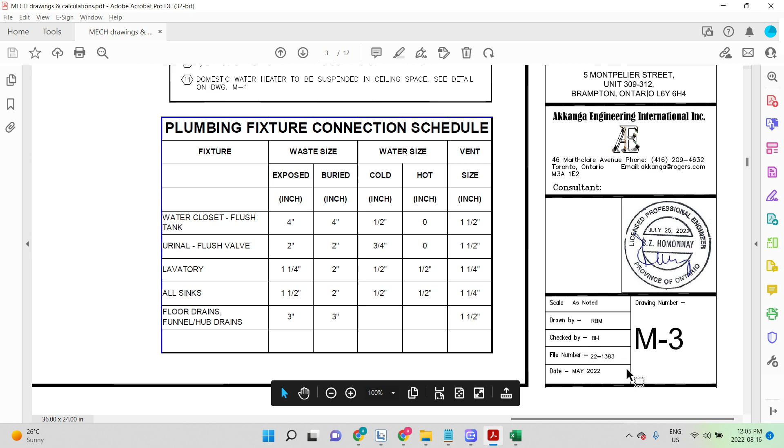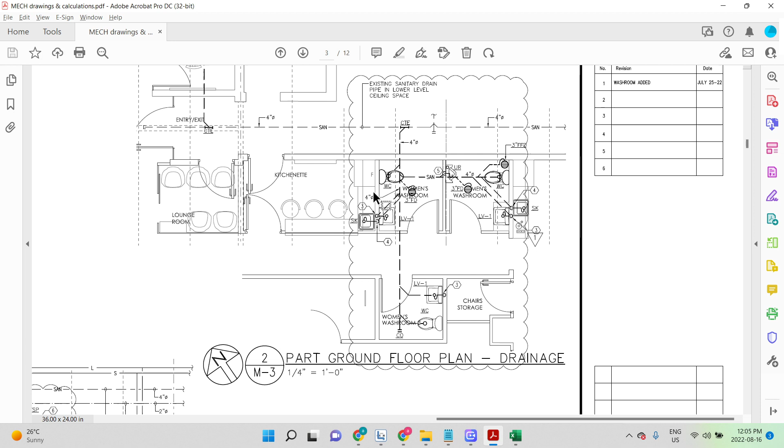But anyways, I'll let you know what this is. I have to check the architectural drawing. I just started, so I said I'll just make the video and go ahead with this. So this is the job right here. This is a drainage, it should be slab on grade, so we're gonna do it that way. Now I'm just gonna do a takeoff, and it might help you. Just one more takeoff video that we're gonna do.

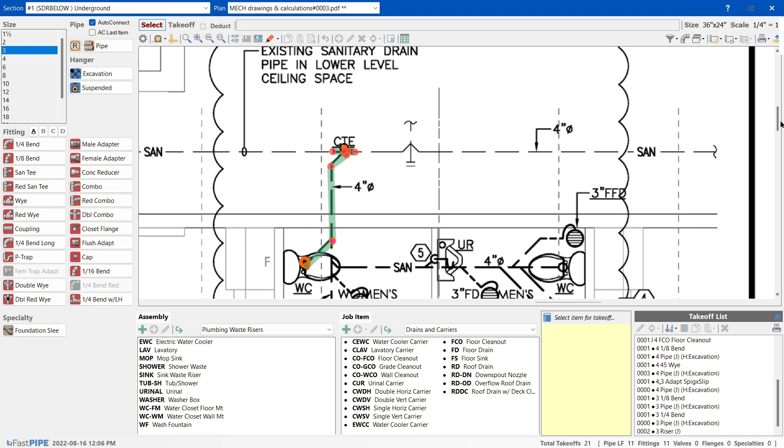So I set it up. I'm starting with underground drain. I did a little bit, but then I stopped, so I'll just let you know. So far we are here: 4-inch pipe, 4 by 3 inch reducer adapter, then made it into 3 inch. Continuing over here, I'm gonna put some music on.

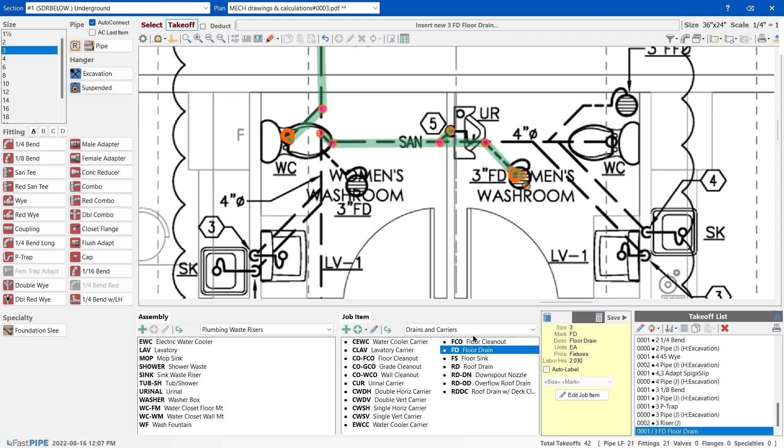45. 4 by 2 inch, so another Y, 4 by 2 inch, 2 inch 45. I like to put a 45 and a 90. The reason is in case you want to put a 45, you can always bring it to the position, so that's why we do that. Then it's 4 by 3, 3 inch, 3 inch again, 45, 3 inch trap, 2 feet of riser, and a floor drain, 3 inch. Beautiful, that completes this. We keep following here.

So I'm not gonna take two, I'm just gonna take one. Underground, I'm just gonna take this one, 4 by 2 inch.

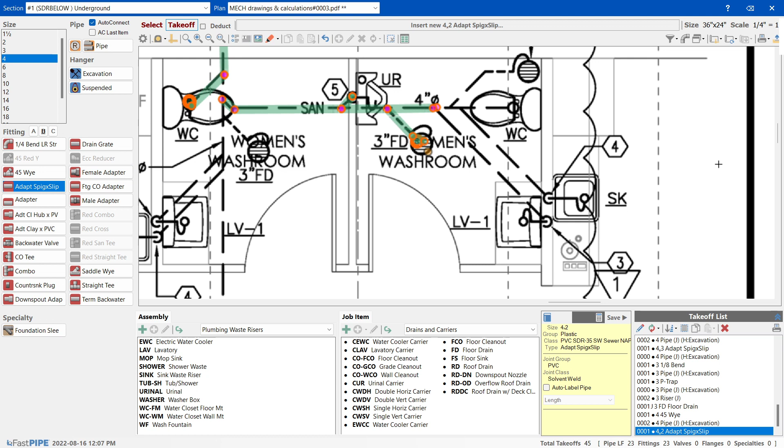So this floor drain, I can wet vent this. So I can wet vent this toilet, and this thing. I can do it all in three. I can wet vent this with this. So let's do it that way, okay? So let me just change all this.

Wet venting is something that a plumber can do to avoid more vents. So we're gonna remove this, right? I'm gonna show you how we do the wet vent. So this is a 4 inch, this is a 3 inch. So this is a 3 inch floor drain and its fittings. Now I'm gonna wet vent this floor drain.

So when you have to wet vent, you cannot take the vent from here. You see how I have to take it from this. This is called the branch fixture drain. This is called the branch drain. Why is it called the branch drain? Because now a lot of fixtures are connected. For example, this is called the branch drain, this is the branch drain. So let me mark the branch drain in one color. Okay, so let me just make it very simple.

Hold on. Let me just explain you something, so at least that way, when you guys are doing it, at least it makes sense, right? It's a branch drain, this is a branch drain. Sorry, this is a fixture drain. These are all fixture drains. And...

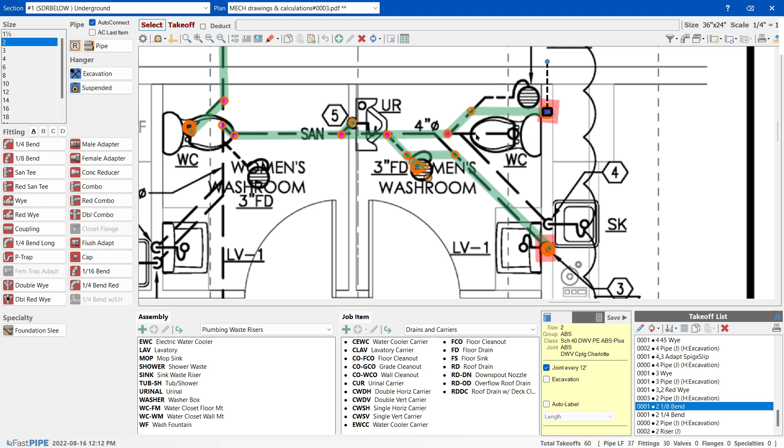So this pipe is for the sink here. I'm going to show you how we're going to do that. Now, why did I bring it like that? The reason is because to wet vent a three-piece, one, two, and three. We're gonna talk more about this when I make another video about wet venting. But for the sake of estimation, estimators can follow this drawing. They don't have to really do it the way I'm doing it, because it requires a little bit of plumbing knowledge. But what it does is that for material takeoff, everything is exact. You don't have to redo it again, so it just saves you a lot of time. That's all.

Another thing we need to do is now 3 inches here, 3 by 2 inches here. So let me just continue this. And 3 inch trap, 3 inch riser, floor drain, and you can just copy paste this too, but whatever. Pretty much then that's it. Take this straight up, riser. Sorry, not clean out, toilet flange.

So that's done. I wet vented the toilet, the floor drain, and the sink together. And instead of giving them individual vents, I can use one vent for everything. Now a sink is always, this is in the floor, but a sink is never in the floor. A sink is always in the wall for 99% of the time, unless it's an island sink or some issue where you can't bring it into the wall. So long story short, you need to have a vent here. Always behind the sink, you're gonna have a vent. So that's why we do it this way.

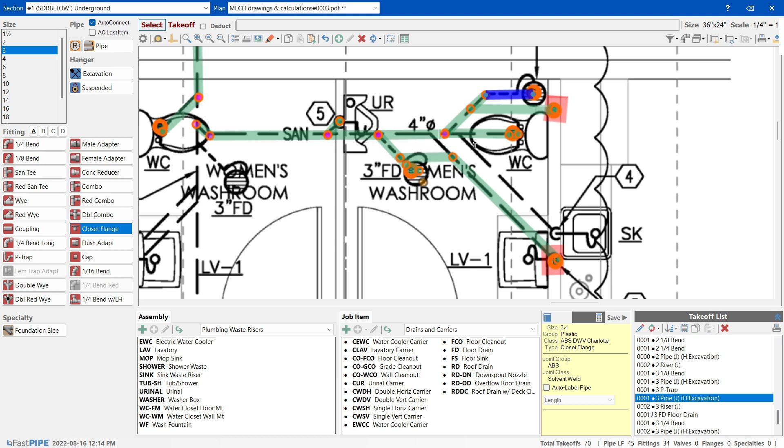Now what happens is, the rule is this is my line, right? This is my branch, so I have to take it from the branch of the 3 by 2. I cannot put a 3 by 2 here. If I put a 3 by 2 here, this will be covered, but I need to put a vent for this one. So very simple, this way, and then you just take it from here. This is your toilet, this is your sink, this is your floor drain.

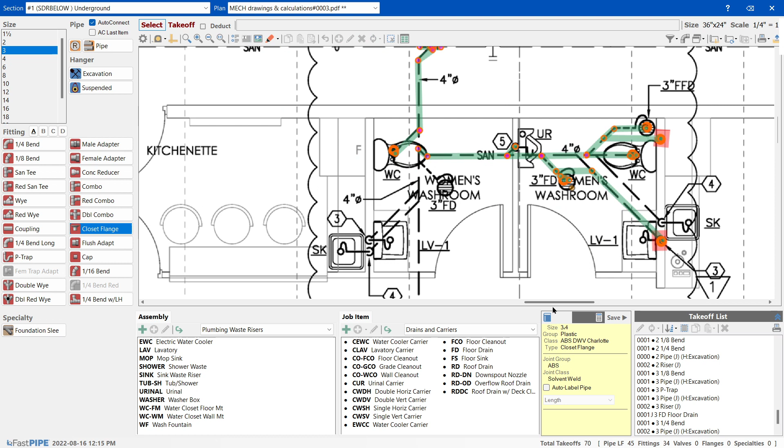So we are done here. Let me just verify it. Everything is good. Same thing with this one, right? Same thing with this one. So you can see if...

Now you see how there's another plumbing here. So if I do it this way, the way it is, I will have to put an additional vent over here for this one and an additional vent here for this one. So I'm not gonna do it this way. How am I gonna do it? I'm gonna show you now.

So I took this Y branch, right? And from here I'm gonna take a 3-inch Y, so it's coming straight, and then I'll take a 3-inch pipe going like this, a 3-inch pipe going like that. This is your branch drain, this is your fixture drain. So I'm taking it for my fixture drain, and I'm bringing a 3-inch pipe.

Now I'm gonna put a 3-inch Y for the floor drain, and I'm gonna give it a wye. Reason I need to use 3x2 is a flush adapter, because I'm not using the branch side of the 2-inch, I'm using the back side of the Y. So that's why I use a reducer now to the back side. This branch is going to be 3-inch. I'm gonna give you a street 45, which is right here, and then a 3-inch trap.

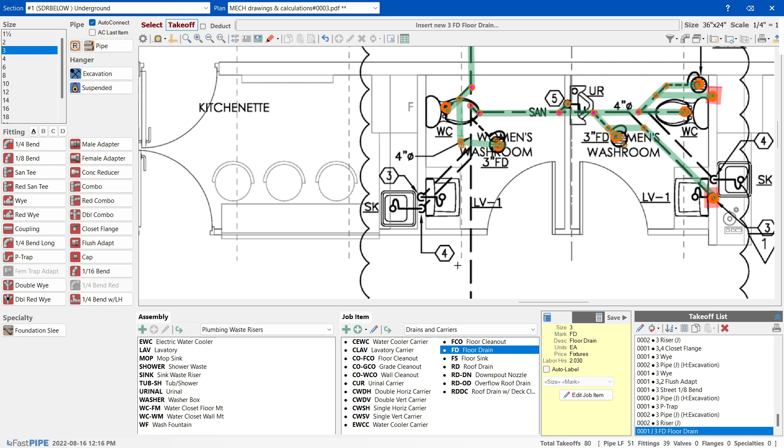Now I have connected this to this. Now this is 2-inch up here, so I'm gonna go take this and I can always put one more fixture in there. Yes, so I'm fine, I'm fine. 3x2 reduced to this, this. 2-inch pipe coming up straight into a 45, into a 90, and beautiful.

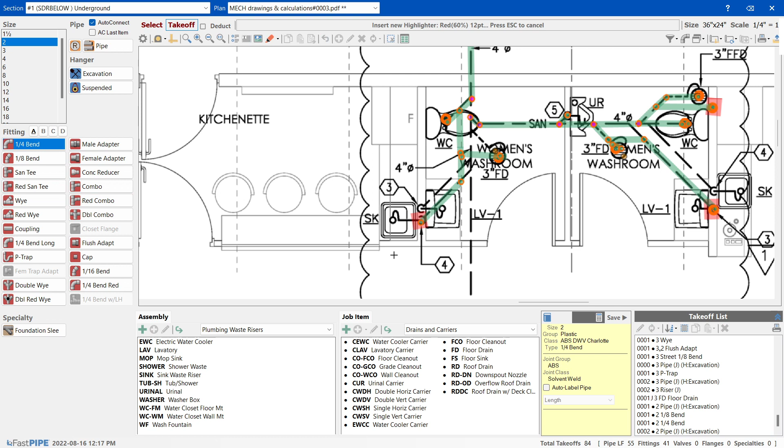And I do this because the sink's gonna come here, so I did not put something for this. I'm gonna show you what I'm gonna do here. I'm gonna put the sink connection in the wall. I did that, beautiful. Now this is all wet vented, and everything is finished. Now all the takeoff is finished.

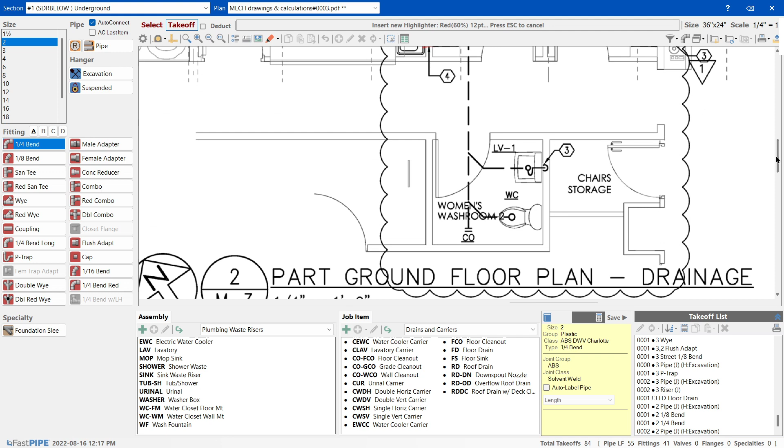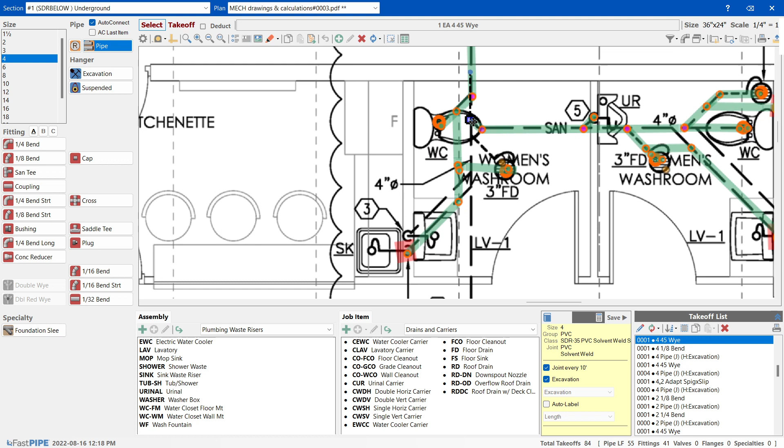Now I'm going to travel this further down here and connect this one. I'm going back to my branch drain, not fixture drain. This is 4-inch, and I'm going to continue, ignore all that, and connect a Y here. Now why isn't it giving me the connection? What's happening? Let me see. This is what? It's a Y. So yeah, we are right. I'm just going to go from here all the way here.

Now there's two ways to do this one. This is a very nice one, a good example for you guys. I put a 4-inch Y right here, and I can do a 4x4x2-inch. I can do it this way.

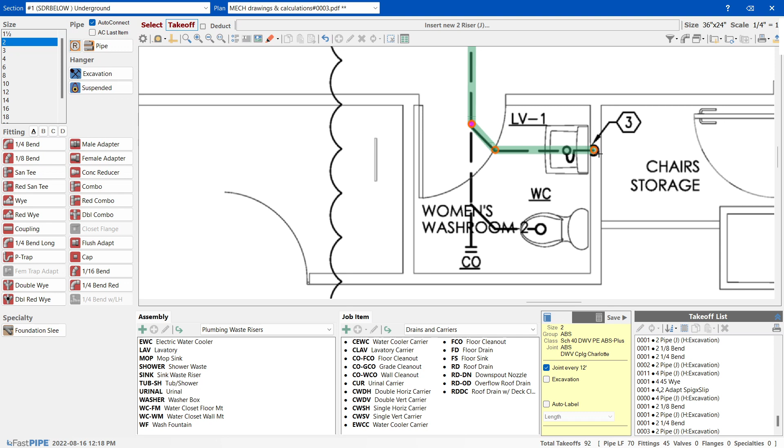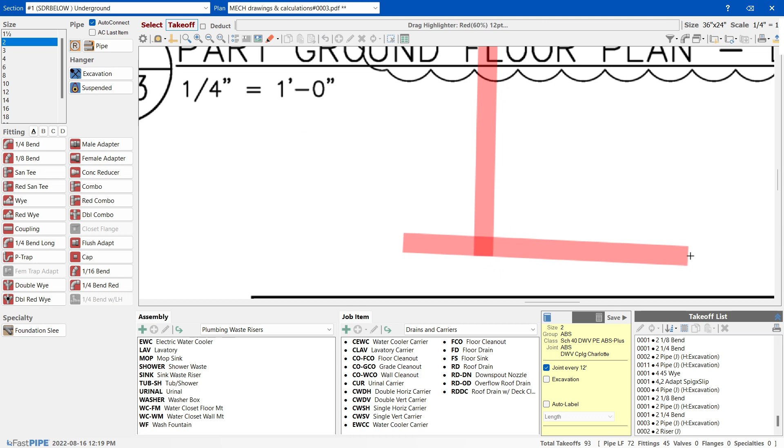Why can I do it this way? I told you a bit before that this is a branch drain and this is a fixture outlet drain. The reason I can do this here is because there are no more fixtures here. This is a cleanout. But let's say if there was a toilet here, or if this line was connecting to a washroom here and here, then I couldn't have done it this way.

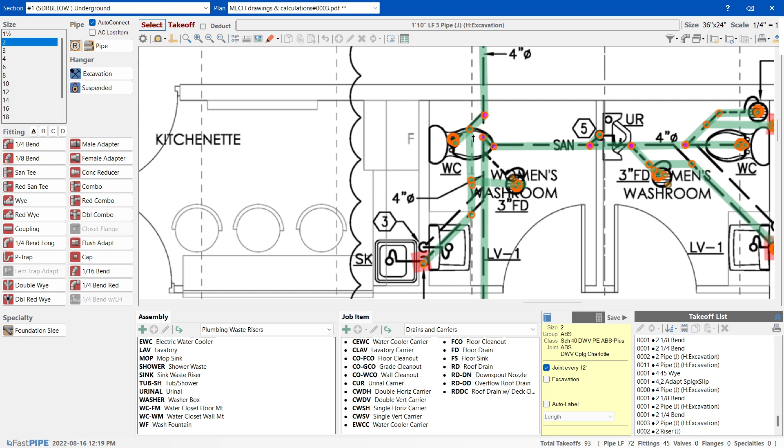Then this would fail plumbing code. This would fail, so the takeoff would be wrong, the estimation would be wrong. This branch is not connecting downstream, so for example, I could have followed this line here if this washroom wasn't there, then it would be perfect. But because of this washroom, I had to do it this way from the fixture drain. Now in this situation there are no more further washrooms.

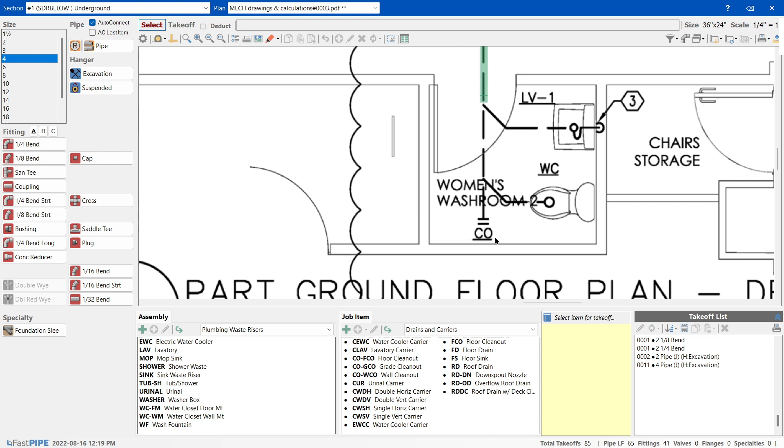So I have two options to do it. I can do it exactly like the drawing. I'm going to first do the other one so it's easier for you. Let's say that if there was a washroom here, how would I have done this one? I would have done it this way, brought it till here.

4 by 2 inch, no, 4 by 3 actually. I'll bring it till here, 4 by 3, and 3 by 2 right here, 3 inch 45, 3 inch 90, 3 inch riser, water closet. Oh sorry, I'm not there yet. Water closet flange, and this is my 2 inch Y. So I'm going to put a 2 inch. First I'm going to make the pipe, so I'm going to go right.

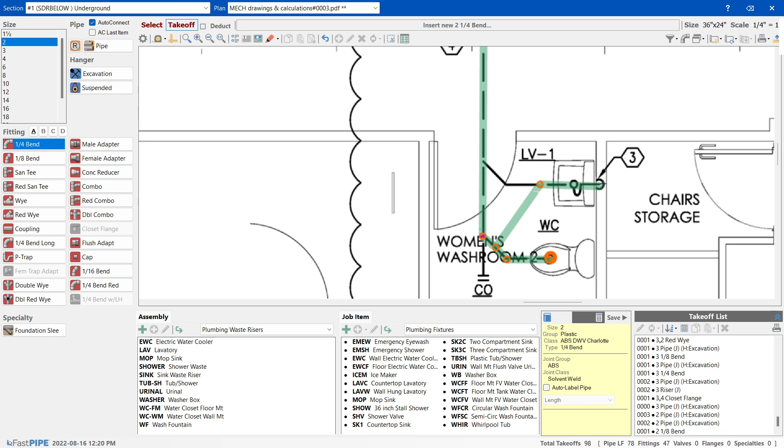Now why did I do it this way instead of the other way? I'm going to show you why. So I'm not going to do it that way right here. Because when you do the trenching, you have to think about trenching too. It's not about that, it's about concrete cutting. Yes, it looks very nice and funny in the estimation here, but you got to think about trenching too. For the toilet, you have to do the trenching anyway.

So what I'm going to do is bring it up like this, put a 45 right here, bring a pipe like this, and put a 90 here. The reason I did it this way instead of the other way is only because when I do my trenching, for example, if I do my trenching for the water closet, I could bring everything in this wall.

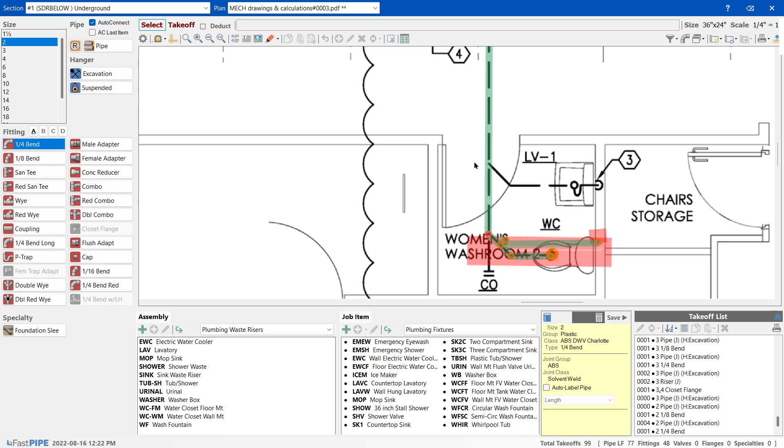So now imagine this, if I had to do it the other way, I would have had to do this. So imagine this is more, or that's more. So you save a little bit over here by doing that. Again, like I said, it's more plumbing, you better estimate better because you estimate a little bit more. If you get the job, at least you don't lose. But I do it this way.

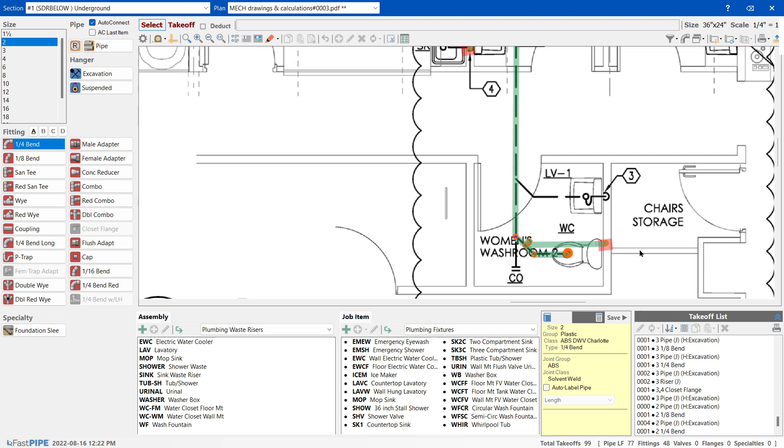Okay, so that's done, as everything is finished. Now I have a floor cleanout. The rule with the cleanout is whatever the size of the pipe is, you cannot reduce the cleanout, you just can't do it. That's a very important thing to remember. So it's a 4 inch thing, 4 inch everything. Let me just verify this is 4 inch. It is 4 inch, you can see it right here. It's 4 inch, that's beautiful.

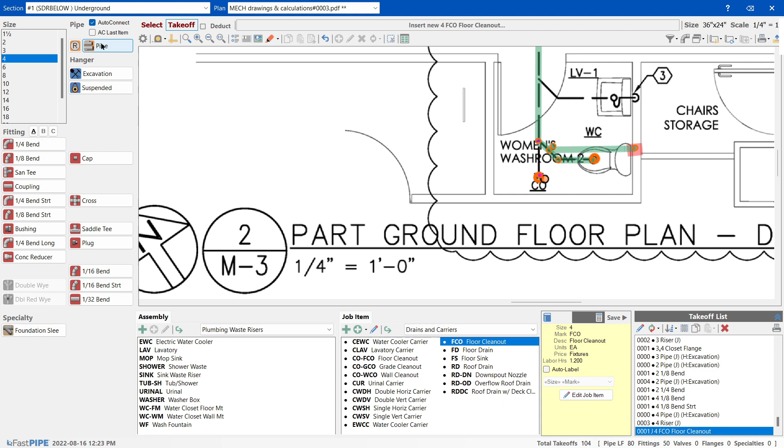Now I'm going to go a riser, cleanout, and I am done. So this is completed, that's completed, that's completed. Now I'm going to go here.

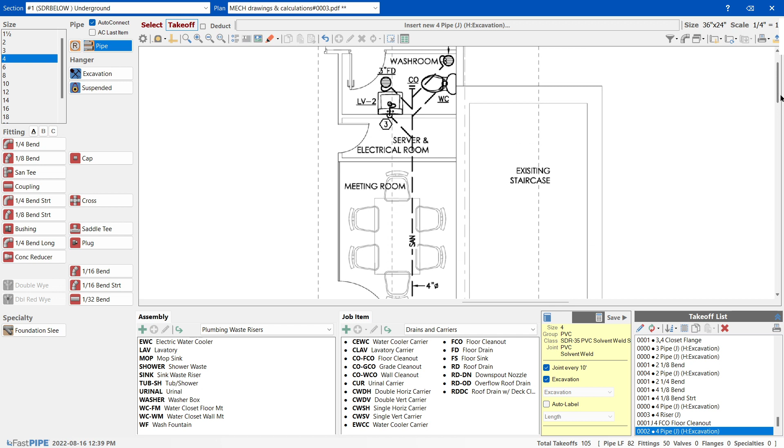So here we're going to start with this section over here. I'm going to look at it. Here you have two floor drains. So this is what I'm going to do for this floor drain.

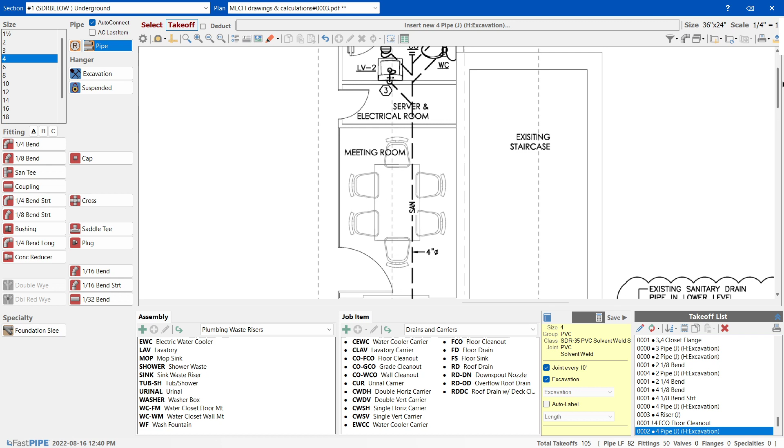I put another 45 here in case I want the Y horizontal with the 45. If I raise it 45 degrees, I can raise it, but then this elevation and that elevation are different. Since I'm connecting to an existing pipe, I shouldn't even do this because this pipe will be really low - it could be 6 feet, 7 feet, and I don't want to dig that deep.

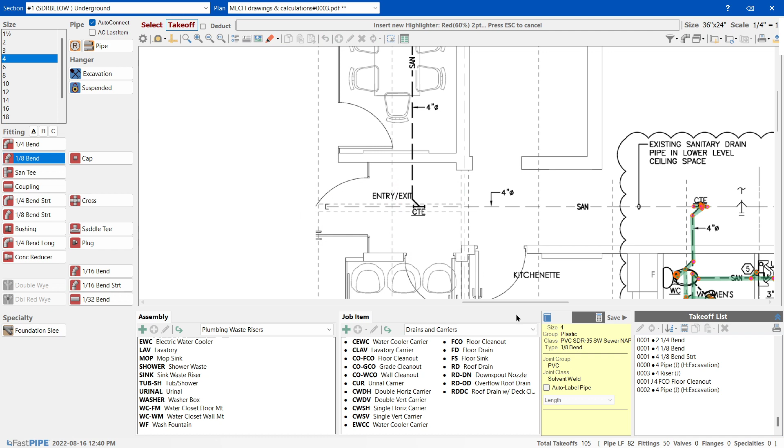So what I'll do is increase it like this. I'll show you how. For example, let's say this is the elevation drawing, and this is the existing pipe going like this.

Let's say the slope is this way. So if I'm going to put a Y, it means I'll put a Y like this. This is my new plumbing. Now if I have to bring it straight, this will be the elevation view and this will be the top view, for example, like that.

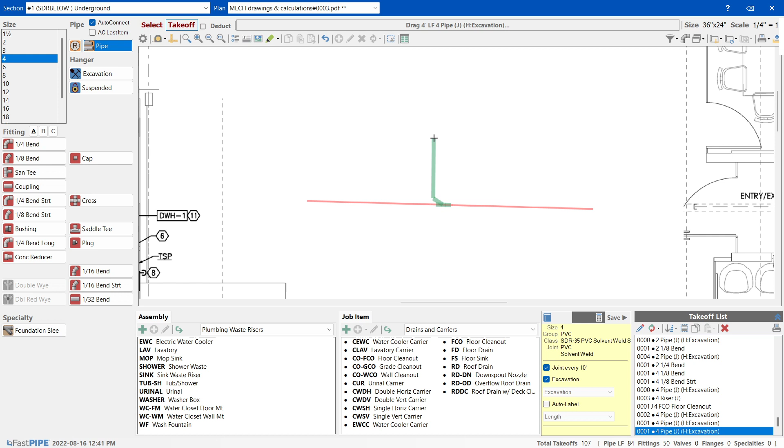But the reality is this is the elevation drawing, and this is the existing pipe. I'm going to raise this with a 45 - sorry, I don't want to make the 45, I just want to show you. So this goes up straight like that, and here is going to be the clean out. Then I'll make another Y here with a 45.

Let's say this is Y and 45A, this is Y and 45B, and you can see this elevation will be much higher than that one. I can set it to any height I want - I can move the whole thing up and down. And this is the cleanout. So this is what I'm going to do over here.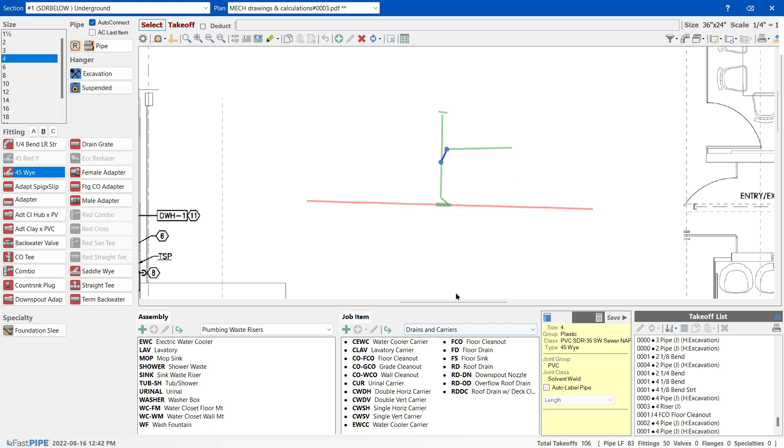Y. I'll get two couplings - I'm gonna put two couplings, but you need rubber couplings here actually. I don't know if there's a rubber coupling section here, I've got to make one.

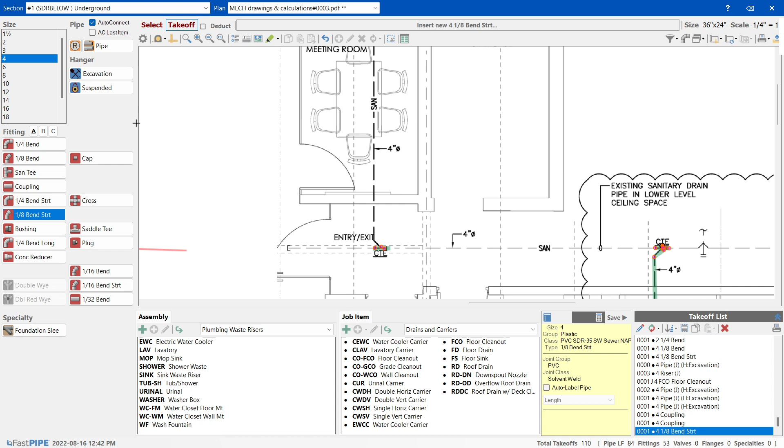So for the 45, I can use a street 45. You always have issue with space there, so why dig more? Street 45 should be here - this is Y and a 45, basically the one I just made.

Now I'm gonna make this one. I'll get a riser, 2 feet, and then put another Y, another street 45.

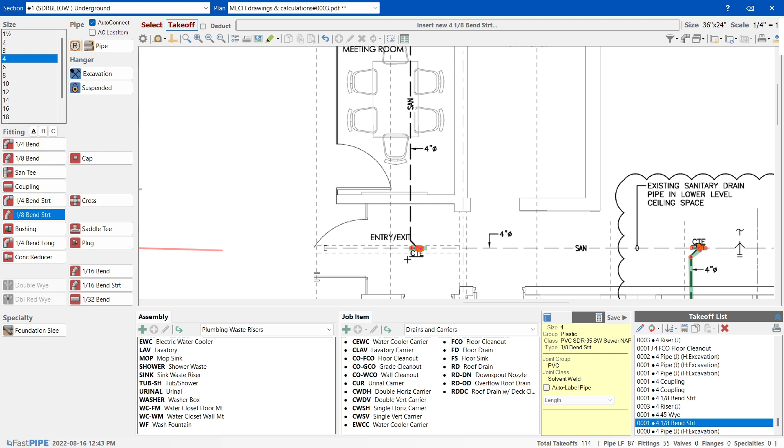Okay, so we'll continue. Last we did was pipe coupling.

We need to put another 4-inch Y. Remember this? It says 4-inch, but it could be 6-inch - let's go with 4. So, 4-inch Y, 4-inch.

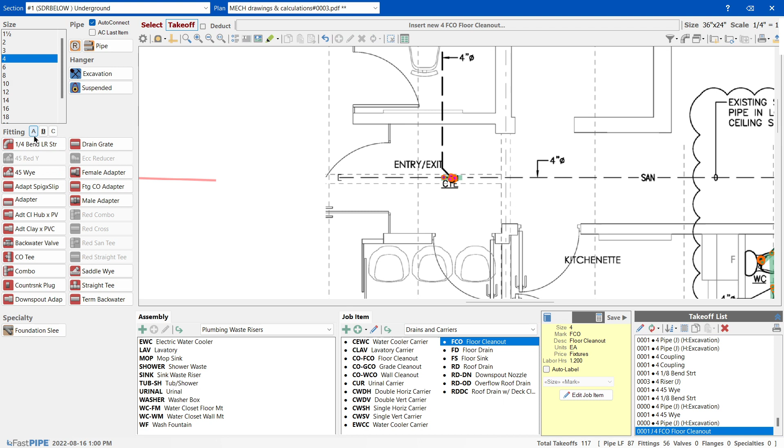My clean out riser, yep - floor clean out. The reason we're putting a clean out is because anytime there's a change in direction, you've got to put a clean out. This 45 is done, but let's do that again.

So here, what I'm gonna do is this - 4-inch Y. I'm just gonna increase this.

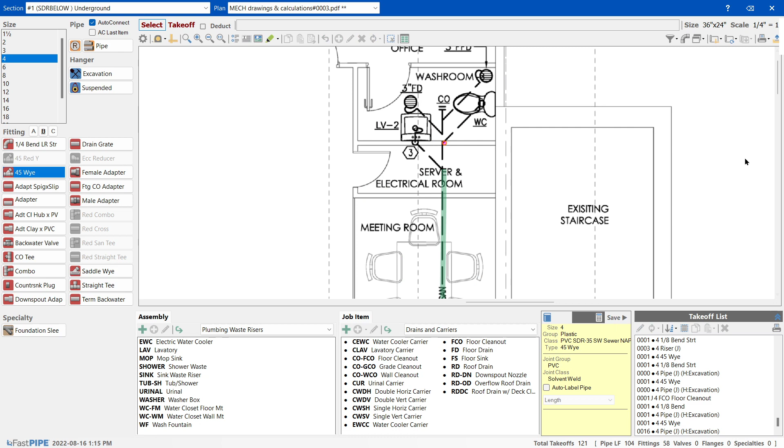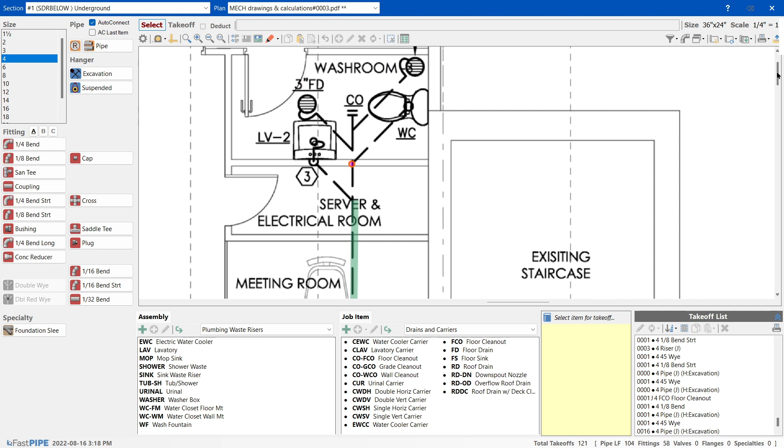Okay, so we're back. Over here, this is a 4-inch Y. I'll extend this over here - 4 by 3-inch reducer, 4 by 3-inch reducer.

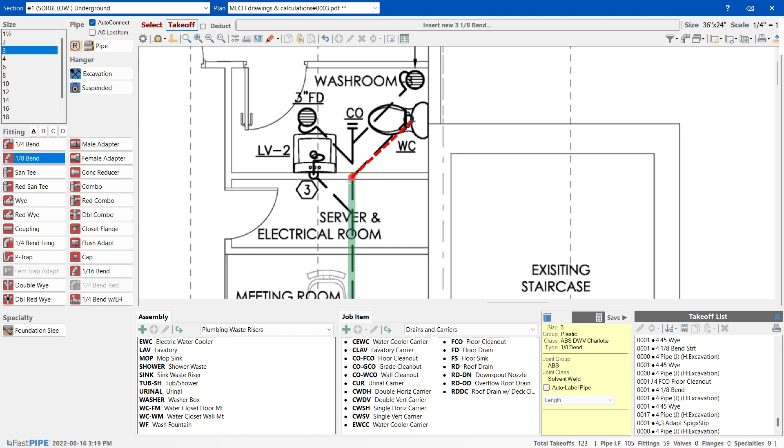3-inch, 45 and a 3-inch 90, riser, toilet flange, 4-inch Y again.

4-inch Y - is this a 4-inch pipe? Yes it is, I'm just gonna extend it here. 4 by 3, one side - yeah, 4 by 3. The 3-inch pipe will go this way, actually.

3 inch, 3 by 2 inch Y, 3 inch 45, 3 inch trap, riser - no, no, no, no, no. I'm gonna do something else. Yes, yes, this is what I was going to do.

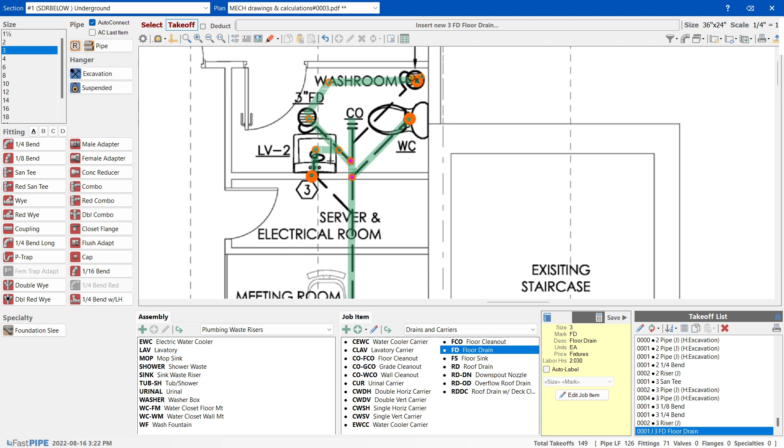And this I gang trapped, but the rule is I can gang trap as long as it's in the same room, and I think not in the kitchen. So this is in the washroom and it's in the same room, so I can gang trap it. The reason for gang trap is I don't have to put two traps - I can just use this trap, there's no trap here.

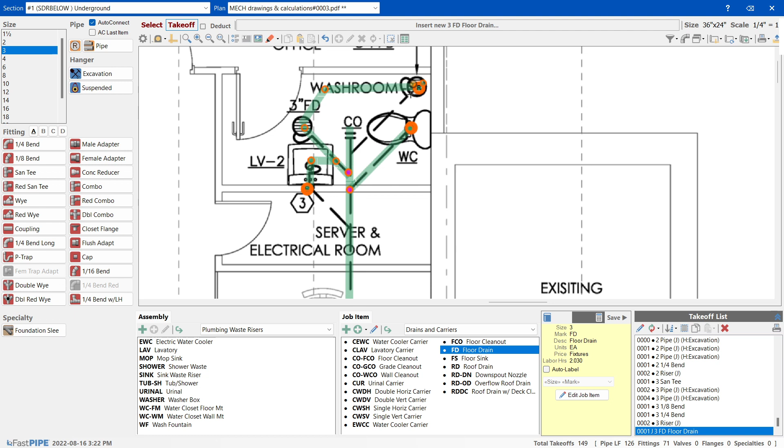90 and bring it up and just put the floor in, and it's actually really helpful for some areas, especially showers - you can gang trap multiple showers, it's good for that kind of stuff. So anyway, we're done - you can see it's a little bit different from there, but it's gonna help us if we do get the job. So this completes the underground plumbing for this place.

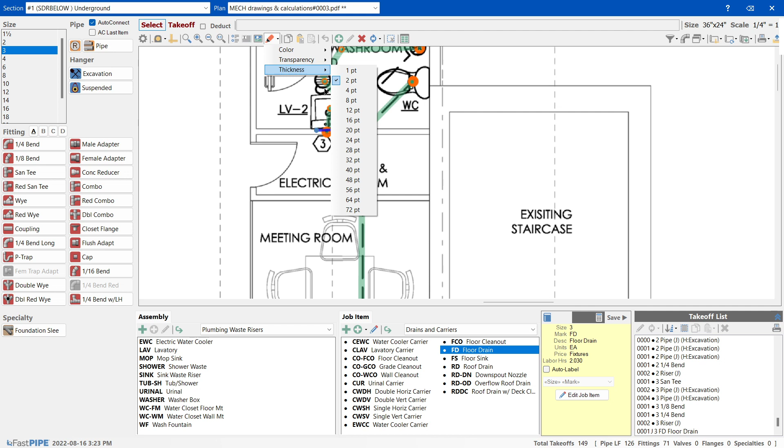Again, I forgot, but I have stuff coming up from here, in the walls, so I'm gonna do that. Actually, it's really skinny, I'm gonna change its thickness. 1, 2, 3, 4 - so everything is pretty much done.

Now we move to wall plumbing, and we'll show that in the next video.